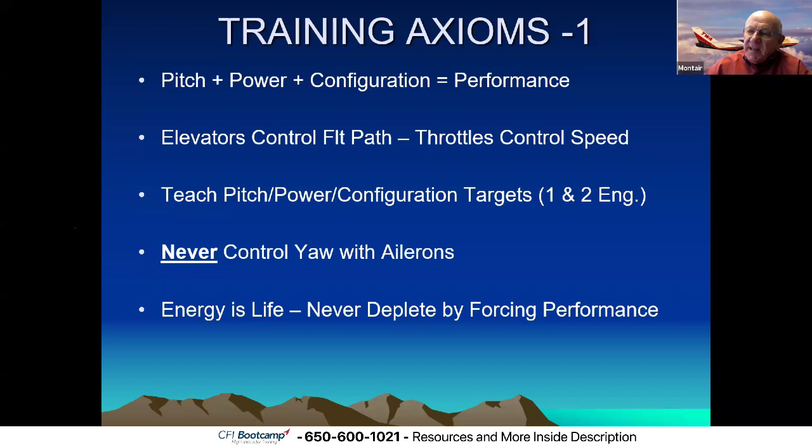So the other thing is they take a line from the fighter guys: energy is life. So when you're at the proper performance speeds, that's all it's going to do. And depleting your energy is only a momentary success, because all airplanes have proper speeds for best performance, but they also have below that minimum speeds for control. And if you deplete the energy below your best performance speed, you're going to have control issues.

So the other thing is, don't get in a rush. I hear people talk about multi-engine training and say how quick you have to do this stuff. No, you don't have to do it quick. You have to do it accurately. And it's an old safety saying that some mistakes can only be made once, and that is true. You want to make sure that you're doing the proper steps, and you have time, actually. That's a myth that you have to do things super fast. So accuracy is more important than speed.

Now, the other thing, OEI, one engine inoperative power available is a function of rudder authority. So if you're on one engine, when the rudder hits the stop, the only choice you have is to back the power off. And actually, I don't like defining VMC as a speed. That's just a number that the test pilots got. VMC occurs when the rudder hits the stop. And if that happens, you have to do something to get it off the stop, either by reducing the power or getting more airspeed.

Automation is a two-edged sword. People get too involved in automation. I mean, under all that automation is just a basic airplane. So you can look out the window and fly the airplane, especially in multi-engine training. Initially, it's all VMC. So automation is a great help, but if it starts to confuse you, it's an old saying in the airline business: reducing automation, reducing workload. So don't get over concerned with programming stuff if you have other things going on.

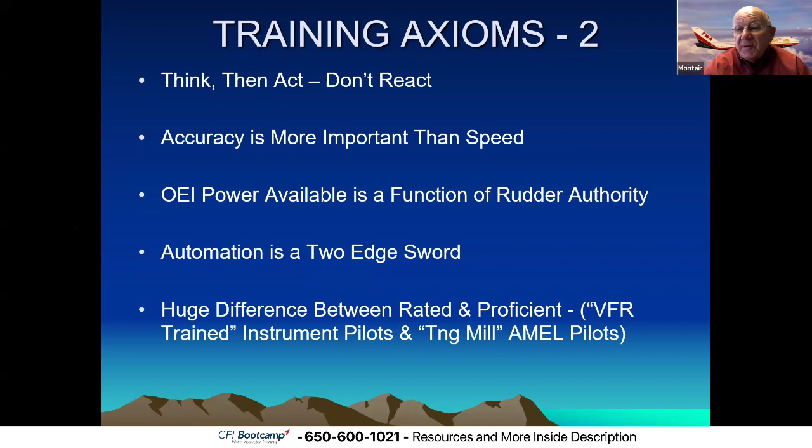So it was interesting. I was watching the other night on the SAFE mentor site, and one of the things Dorothy asked was, what scares you the most in training? And it's student impulsivity. Every once in a while, a student's going to do something, and an impulsive action to me is something that's totally off the chart. One of the exciting ones I had was doing an elevator trim stall with a student one day, and he put full down elevator. That was pretty interesting.

So the way you're going to protect against that is when you're the pilot monitoring, in other words, you're an instructor. So your student is flying, you're the pilot monitoring. You need to be mentally flying that airplane all the time. And that's how you're going to tell when to intervene, because if you're mentally flying the airplane, then you have an idea where the airplane should be going. And if it doesn't go there, then that's the time to start watching what's going on. And you have to guard the controls, and guarding controls is not holding on to the controls, but being able to get them very, very quickly.

Because if they do something really off the wall, you have to stop it. And if your hands are in your lap, you aren't going to have time. So especially in some of these critical maneuvers, you have to have your hands ready to act if you need to. And if you have a question whether you should intervene or not, intervene, because after a while you're going to learn, but better intervene too quick than too late.

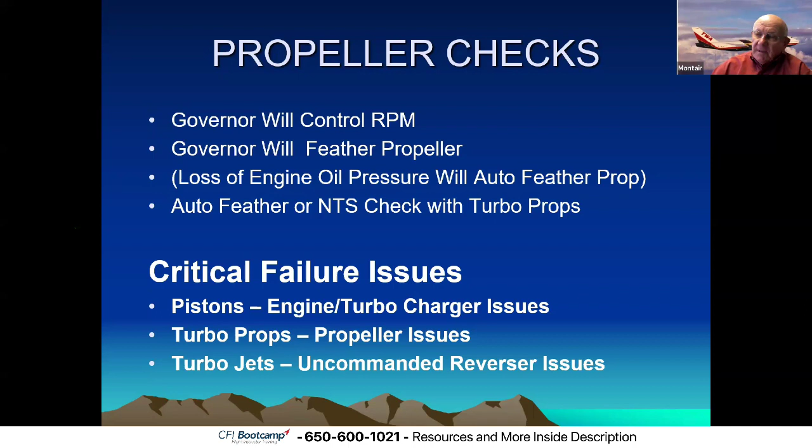But I've got into different twins when I'm flying with an owner. I do a lot with owner airplanes. And I've seen them where I move the governor and I can't control the RPM. Well, that's not so dangerous. But I had one, I went to fly with a gentleman and we did a feather check and it wouldn't feather. And boy, that's a no-go because the airplane will not fly on one engine if it's got a windmilling prop. So that is something you need to check.

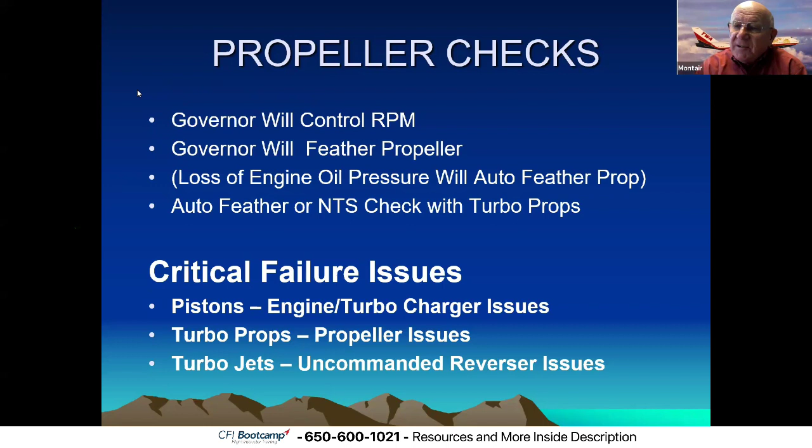If you get into turboprops, they either have auto feather in the Beechcraft King Airs, or they have what they call NTS, which is almost auto feather in the Garretts. But if those don't work, there again, your speeds are based on those things working, so they have to work. The turbojets, the big thing there would be an uncommanded thrust reverser, which is bad news. They've fixed that mostly now because the uncommanded thrust reverser should snap the throttle closed. Didn't used to be that way.

So we're going to start off. One of the things we teach is rejected takeoffs. On a rejected takeoff, I usually do that with a mixture control because cutting the mixture means the student can have both hands on the throttles. But when you do that, that airplane is not controllable until the throttles are closed. So that's not something you're going to spring on somebody. You're going to talk about it and brief it, and probably I'm going to do an additional RTO with less than full power so they can see the yaw rate. But because it's going to turn, there's just no way to stop it from turning to get the throttles closed.

I use a minimum of 100-foot runway width to do that, which is interesting. You see that number come up a lot on using reverse thrust on narrow runways. They don't recommend it. So I teach aborts from static thrust takeoff. If you look at the ACS, it says the maximum engine failure speed is 50% of VMC. Now, one of the things that's interesting is we have a VMC air and a VMC ground. They're talking about VMC air.

So you want to do this, and the lower the airspeed is when you cut the single throttle, the more yaw you're going to get. So the worst case is a slow RTO. So typically on an RTO, after we've gone all through this, you start with a short field takeoff, which is static thrust, full power.

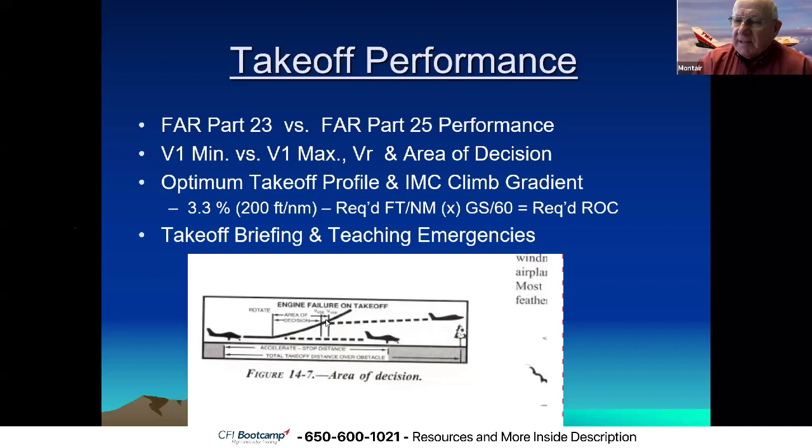So this is what it looks like. There's the area of decision, from where I can no longer stop, where I have the gear up. And basically 400 feet is what we use for testing, but if the gear's up, it's going to go if you don't have a terrain challenged airport.

All right. So now we're in the air. I want to talk about lift and drag because we have to know what these airplanes are going to do. And the lift drag demonstration is so that you know the performance loss you have for different configurations. And you really need a smooth day for this. We're up in the mountains, and if I get lift and sink, it does not work well because it changes. We're trying to measure small numbers, and lift and sink doesn't work. So the bottom line is I do this in a descent.

And so remember, we're up high, because normally the FAA says you have to have a 3,000 foot floor for all engine training, but we use a 5,000 foot AGL floor for training. So we're probably at 6,000 feet doing this. So slow to blue line and really take your time. I want to get it trimmed up.

I want to get the power on two engines so it's just flying, just enough to fly the airplane at blue line. And now I'm going to do a power trade, right? I'm going to bring the left engine back to zero thrust. I'm going to bring the right engine up to whatever power it takes to hold blue line, because I want to look at a couple maneuvers clean. And so we've got the airplane now flying with just enough power in one engine, the left engine at zero thrust, right engine at power, and a 2-degree bank, which is optimum for performance.

So the first thing I'm going to do is, actually I've got these backwards. The first thing I usually do is a 15-degree bank turn either way, half standard rate, and the airplane will fly level. Now, if I roll into a 30-degree bank, you notice it's going to start to sink. So a 30-degree bank is probably going to cost you 100 foot a minute, basically in a Baron. If you go back to 15-degree bank, it comes back. So we're going to want half standard rate turns until we get some altitude.

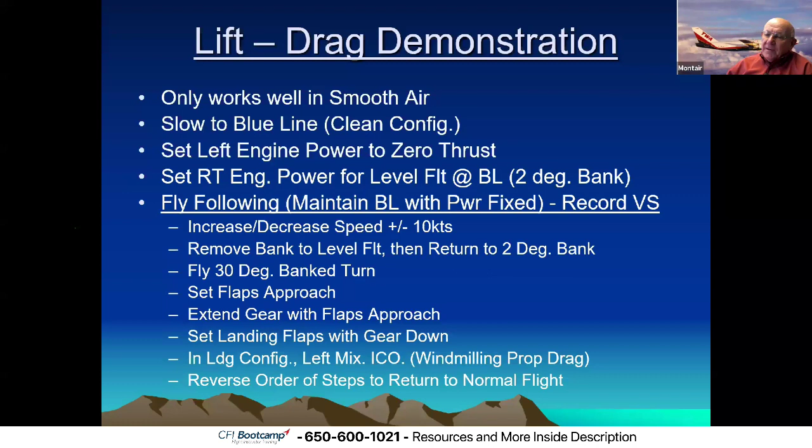So that being said, I want to look at some VMC demonstrations. Now, one of the things we want is to give the student a chance to fly this airplane a little bit and see how the airplane acts with a VMC roll. We're not going to block the rudder, because I don't like blocking the rudder. What are you teaching if you block the rudder? You're teaching he doesn't have to push the rudder that hard. I mean, the rudder can be stiff.

Matter of fact, if you look at what's allowable for rudder pressure, it's I think 140 pounds. That's a lot. Now you're talking about something big, like maybe a Convair 440. But in a Baron or a P Baron, you're probably going to end up in 50, 60 pounds of foot pressure. People get tired. And I don't let them use rudder trim for this, because I want them to know how much it takes to push that rudder to the stop. So we're going to start wings level.

Now, remember, when we go to wings level, the red line they give you was done with a 5-degree bank. For every degree of bank I take out, I've increased my VMC by 3 knots. So if I go from 5-degree bank to level flight, we have a 15-knot increase in VMC, which is what I want. Because I'm not trying to certify the airplane, I'm trying to show people how it acts.

So wings level. Now, because there's different airflow over the engines, I have three airflows on a twin. I have free stream air outside the propellers. On the windmilling engine, I have less than free stream air, because the windmilling propeller is taking energy out of the stream. Behind the operating engine, I have more than free stream air. So the two wings are providing different lift. It's going to take maybe 3 or 4 degrees of aileron input to neutralize that. But once I have that, so it stays level, that's all I'm going to use.

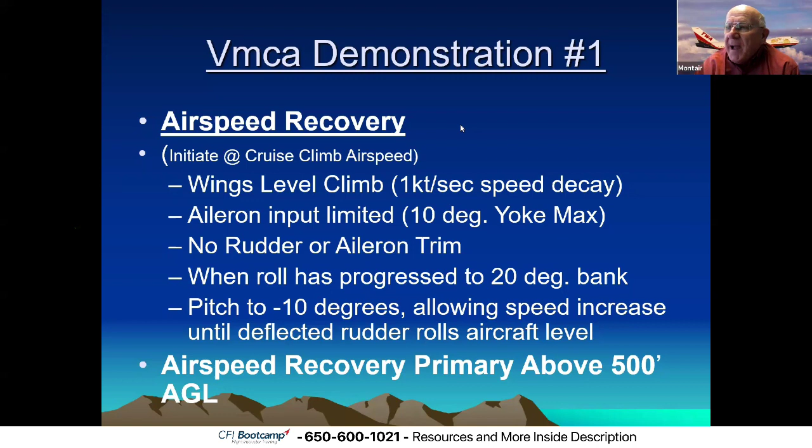Now we're going to go back and do the second thing, and now we're going to talk about power recovery. I'm going to use a power recovery because if I'm down low, or let's say I'm out west and I have a normally aspirated airplane and I have an engine failure, it's going to go to the ground because my single engine service ceiling may be below ground level, and I have to accept that.

That might, or I may have terrain and I have no choice but an off-airport landing. However, I'm not going to crash it at blue line. I'm going to slow it up. And this goes back to what we were talking about. The maximum asymmetric power I can use is determined by my rudder.

So in this one, we do the same entry. Now, everything's the same, wings level, only enough aileron to keep the wings level before we start. No rudder, aileron trim. We let the roll progress to 20 degrees of bank. Now what we do is we're going to take the good engine. You're not going to jam the throttle closed because I want power, as much power as I can hold. We're going to bring it back probably between half and 2/3. And as you do that, you're going to see the airplane roll level.

So I've got full rudder stop. I bring the throttle back till the airplane rolls level. Now, what I want him to see is that he has to manage the throttle with the rudder he has. So what I do with this one, I just keep letting it slow up. Right? As it slows up, you keep bringing the throttle back. One of the deals with this is people want to take their feet off the rudder, but this is a full rudder maneuver, and you can walk it right back.

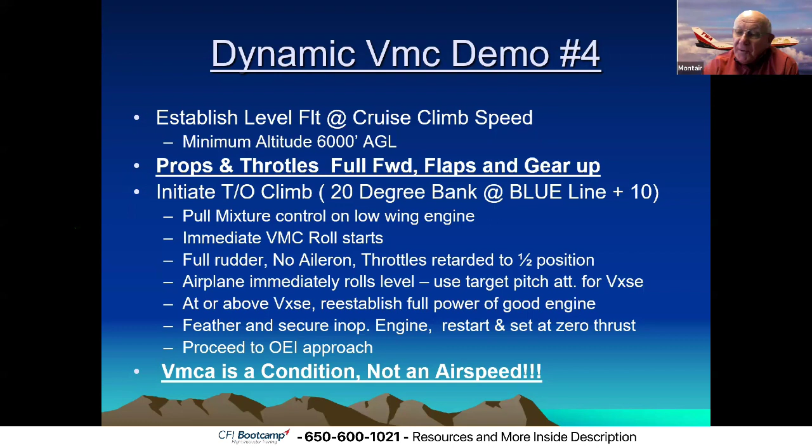You can run into a feathering drill with this, because once I've got my power back up and my correct airspeed and the airplane's under control, I can, there again, foot on the throttle, look, verify, throttle closed to verify, propeller control back to make sure I got the right engine, feather it, and you can walk right into a zero thrust. It's an interesting maneuver to take that through to zero thrust, and you can let them do some maneuvering with the engine feathered.

So now we want to look at the FAA practical test demo. Now this can be done safely, but there are some differences. First of all, they're going to initiate it at VYSE in takeoff configuration. Okay, so that's a little slower than I'm doing it. I usually do it at cruise climb, but it doesn't matter. We're going to initiate it with the critical engine windmilling. So to set this up, once I'm at VYSE, I'm going to bring the left engine back. Usually that's the critical. And I don't find counter-rotating propellers make that much difference, really. So I still always work with the left engine because that works with all airplanes.

So to get it windmilling, the throttle is hard closed. The good engine, the right engine, you ease up to max power. So you start this with the mixtures full rich, the props full up. I bring the left engine back to idle, the right engine comes to full throttle. I start that climb, and they say at VSSE plus 10.

Now, VSSE is safe single engine, and the newer twins, they give you a number for that. That's the slowest speed you ever want to do a dynamic engine cut. But in fact, if you don't have that, VXSE works, and that's why I use that minimum airspeed as VXSE, because that will sustain a dynamic engine cut. You can control it.

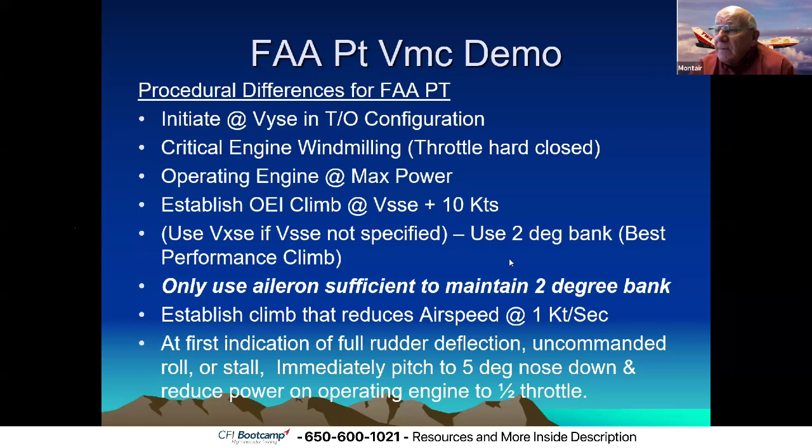You want the airspeed decreasing 1 knot per second; that comes from test flying. That's what they always do, that slow deceleration. And they say it's the first indication of full rudder deflection, and probably that's what you're going to have if you use a 2 degree bank. Uncommanded roll. You don't need to wait for uncommanded roll. When the rudder hits a stop, that's VMC. And do not stall the airplane. Ailerons will stall the airplane. Immediately pitch to 5 degrees nose down, reduce power to the operating engine. So they want a combination of the thing.

Now, I need to talk about an emergency upset recovery, because if you get on the ailerons, this airplane is not a normal spin. This airplane's going to snap roll. And one of the things that's interesting, and this has nothing to do with twins, but I would recommend an upset recovery program for everyone. I was so lucky that my boss, before I got done, got me in. Calspan had a variable stability Learjet, and you could pretend it was a 737. We went up and did a lot of these things in the Lear. So you get the G forces.

But boy, if you can get into a Decathlon with somebody, go up there and see what a snap roll looks like, because it's very different. So if this airplane snaps on you, you can't wait. You've got to act immediately. And this is an upset, what they call a departure in the military.

It's any kind of wildly lost control because the wing is stalled, and you cannot let this thing develop into a spin. It's unrecoverable. So in any kind of deal, you're going to immediately close the throttles and point the airplane straight down, I mean with a very positive forward push. We're talking about half G to 0G.

Throttles: yank both throttles, not close gently. Yank both throttles closed and 0G the airplane straight down, right? No aileron, full rudder. And bottom line is there's no stalling. As stalling speed goes up with G load, it also goes down with G load. So at 0G, there's no stalling speed. And what that does is reattach the airflow.

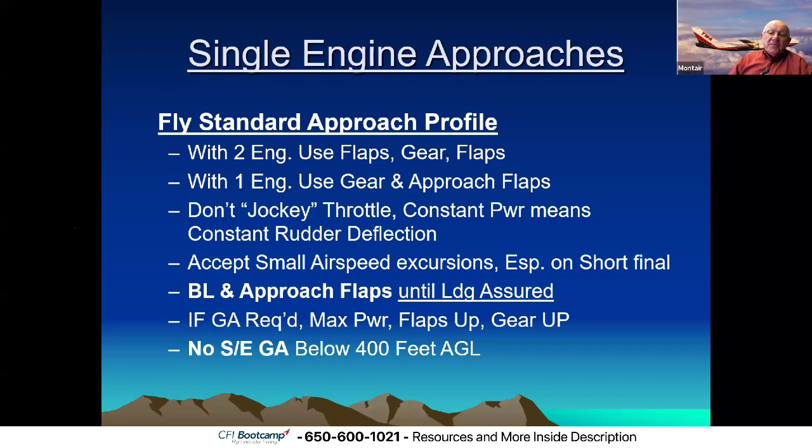But I do show multi instructors a go-around, and that is at 400 feet, you just come up with full throttle on the operating engine. You already have the other one feathered at zero thrust. Of course, as the throttle moves, the rudder moves, and then you just have to go to blue line. You have to go to pitch attitude. It'll sustain blue line until it's cleaned up. It's going to go back to 200 feet a minute again. And a lot of approaches up here in the mountains are higher because of the missed approach requirement.

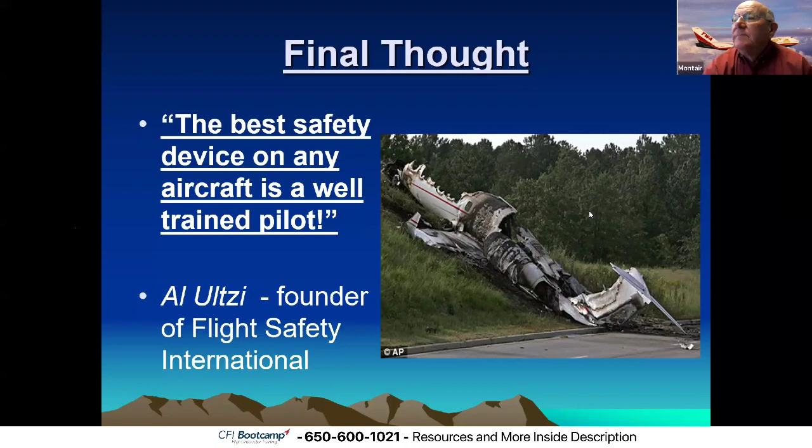With sport pilot stuff, they'll all learn something there. I didn't realize that you can't use IACRA for that. There's no IACRA provision. You have to do a paper 8710 for the sport pilot stuff. So that's stuff we need to know, because we're going to be seeing that next year.